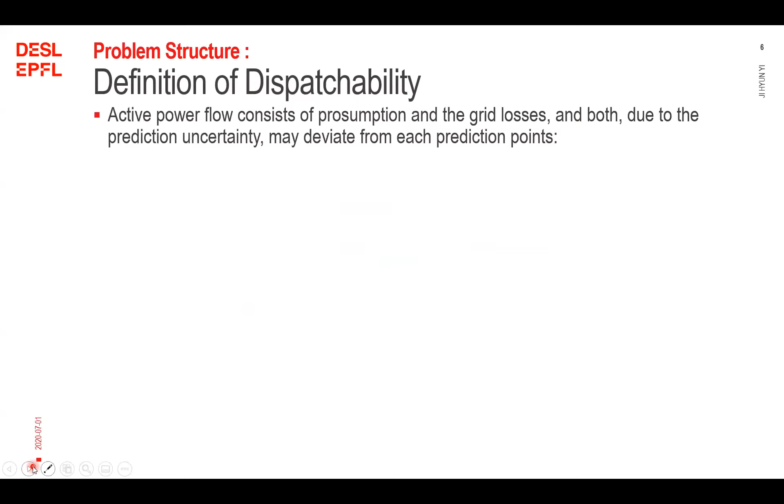First, let's have a look at the definition of dispatchability. The active power flow at the GCP consists of prosumption and grid losses over all nodes within the network. Due to prediction uncertainty, the prosumption at each node deviates from the prediction point, as well as the line losses. Therefore, we express the prosumption and grid losses by prediction and deviation.

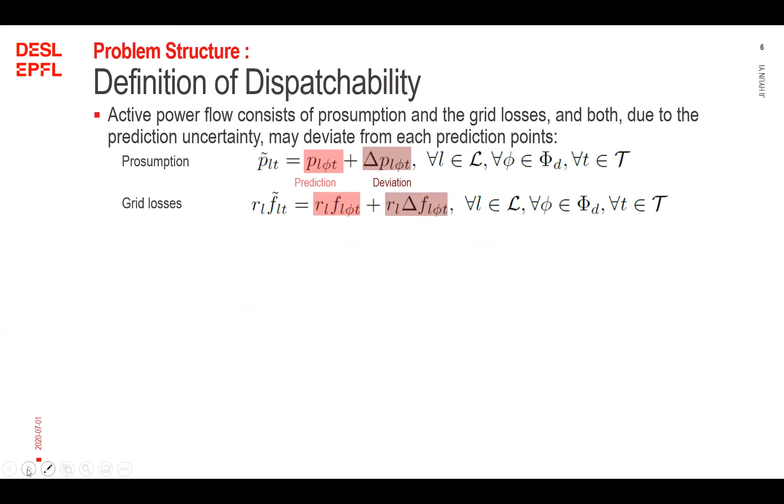The dispatch plan denotes the predefined schedule of active power flow at the GCP that the feeder should follow. It is determined based on the sum of the offset profile of each ESS and the aggregated prosumption prediction, considering the grid losses.

The power mismatch between the dispatch plan and the realized active power at the GCP can be indicated as the left side of this equation. This mismatch can be divided into two terms: the mismatch covered by the ESS, and the leftover mismatch, which would be observed as dispatch error at the GCP.

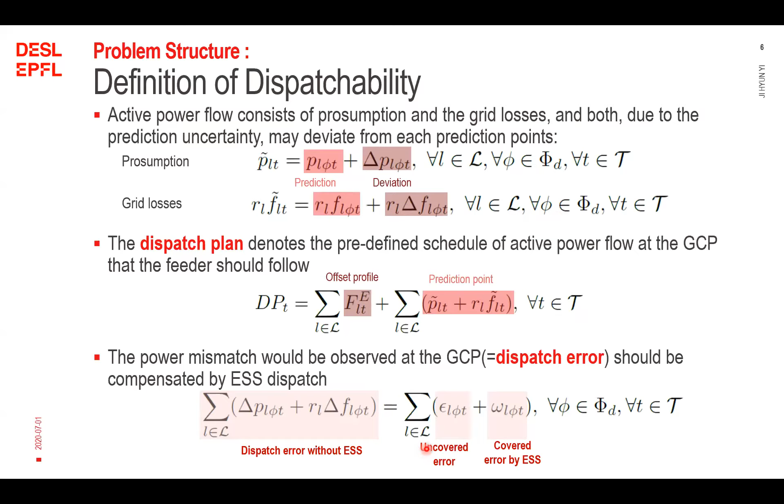In order to enhance dispatchability, the ESS control strategy is designed to maximize exploitation of the ESS capacity for compensating the uncertainty due to the stochastic nature of the resources, while complying with the ESS energy and power operating constraints. The control term is defined as the offset profile, which is assigned to each of the allocated ESS, as shown in the expression here.

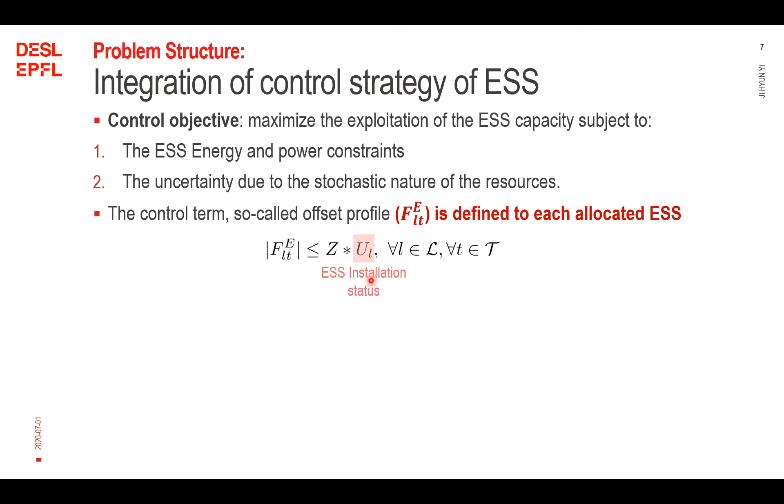The offset profile adjusts the ESS active power with the objective of restoring an adequate ESS state of energy, such that during operation, enough up and down flexibility is available to compensate the mismatch between the prediction and the realization of the prosumption.

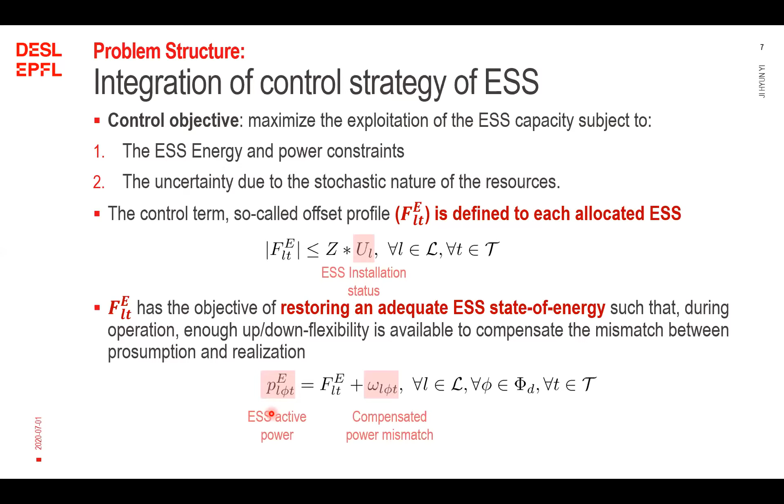The offset profile is embedded into the operation of ADN by simply adding the offset profile to the dispatch plan, along with the prosumption prediction.

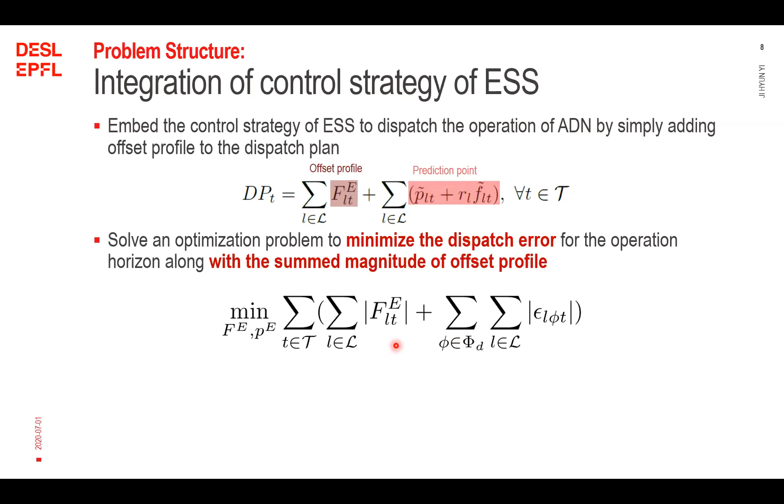We solve an optimization problem to minimize the dispatch error for the operation horizon, along with the summed magnitude of the offset profile, while subjected to the network constraints and also the ESS-related constraints. We can determine the dispatchability of ADNs by the total magnitude of dispatch error for the operation horizon.

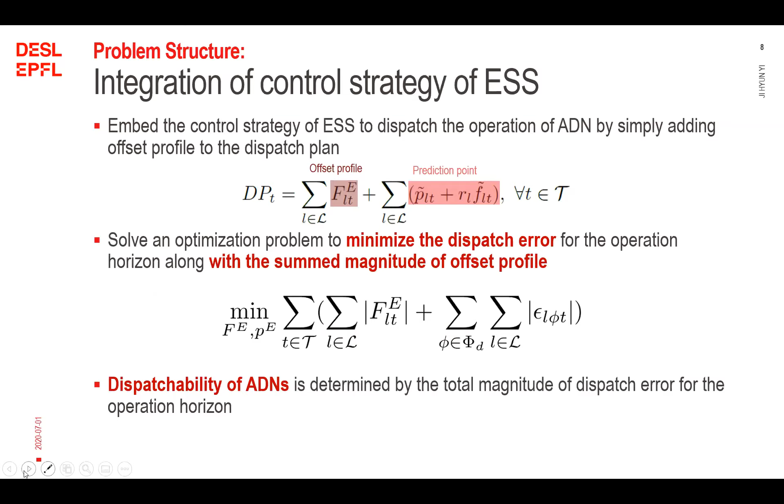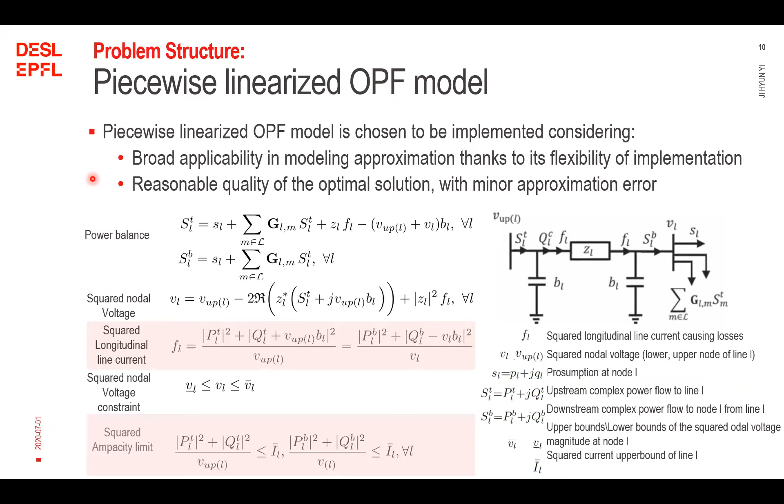In order to convexify it, it is converted to a piecewise linearized OPF, which I would call PWL OPF from now on. We chose to implement the PWL OPF because the method is widely used in tackling various research interests in power systems, thanks to its flexibility of implementation. Also, it can achieve the optimal solution of reasonable quality with minor approximation error from the original OPF solution.

In PWL OPF, we linearized the nonlinear term within the power flow equations and constraints. First, we replaced the nodal voltage variable with the voltage lower bound value. Then we apply the piecewise linearization function to all the quadratic terms, which are the upstream complex power flow on the line and downstream complex power flow on the line, and also the line longitudinal reactive power.

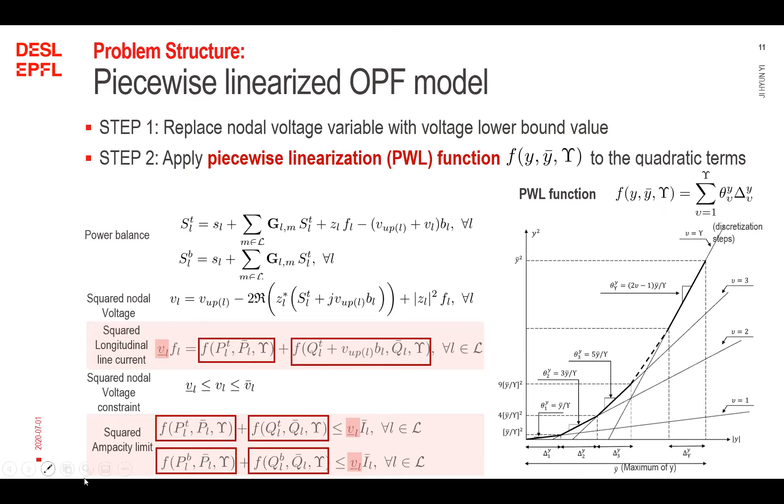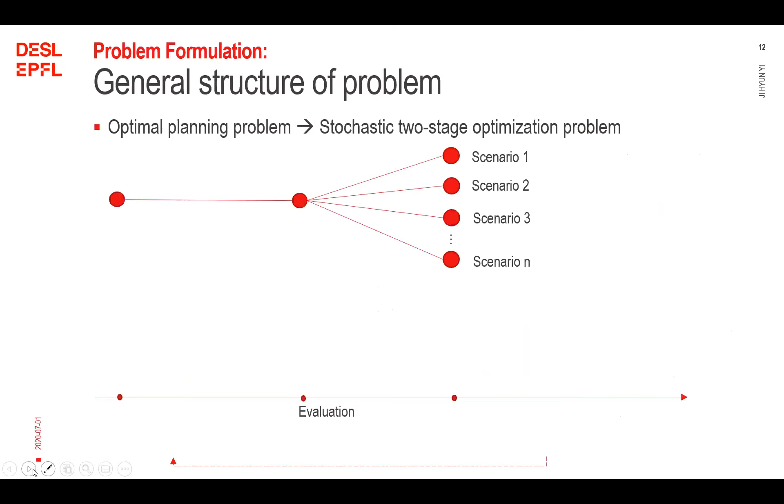The planning problem is formulated into a stochastic two-stage optimization problem. In the first stage optimization, investment decisions including ESS installation, energy reservoir, and power ratings are determined. And the prosumption uncertainty is realized in the second stage optimization as operating scenarios.

In the second stage, considering different operative scenarios, the ESS contribution is assessed based on the OPF model, taking operational decisions such as offset profile and ESS dispatch regarding the dispatchability of ADN. When the optimal solution is obtained both from the first stage and the second stage through an iterative process, the global optimal solution is obtained.

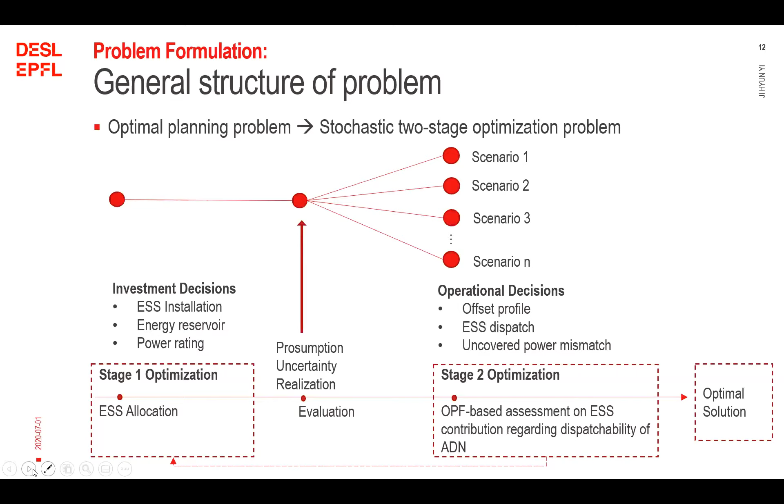More specifically, we present a two-stage procedure for the optimal siting and sizing of ESS, considering the control strategy of ESS. To tackle the computational complexity of the proposed planning problem, we decompose it into two problems by applying Benders' decomposition technique. The first is the master problem, which corresponds to the first stage optimization problem explained on the former slide. And the second is the subproblem, which is equivalent to the second stage optimization problem.

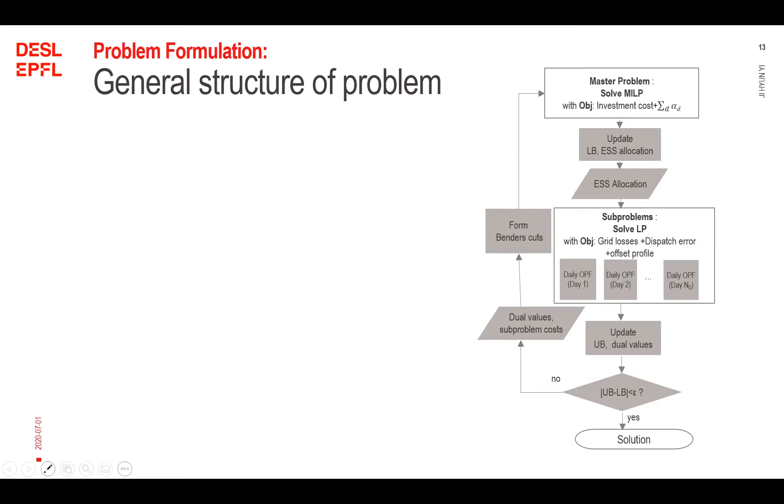In the master problem, we determine the ESS allocation with the objective of minimizing the investment cost of ESS, which comprises the fixed cost, power rating cost, and energy reservoir cost. Also, the approximated subproblem cost should be added. The constraints are grouped as the investment constraints and the cuts for the Benders' algorithm.

Investment constraints include the possible power rating range and the energy reservoir range, and also the maximum power that can be discharged or charged relative to the maximum capacity.

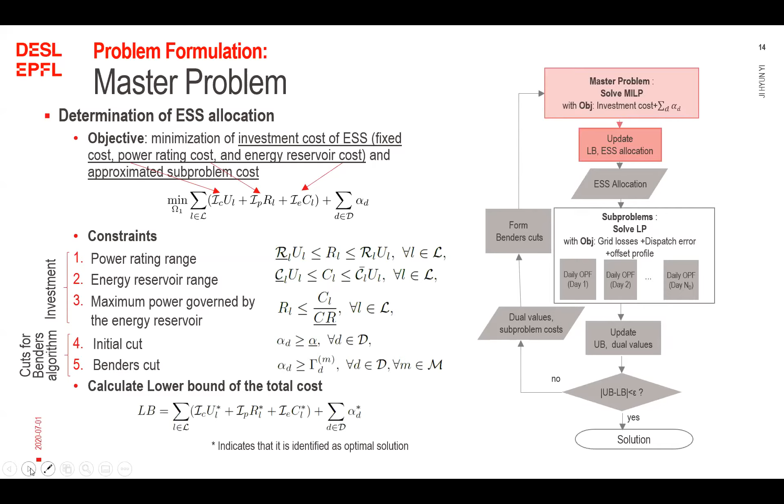For the Benders' cuts, there should be an initial cut which lower bounds the subproblem cost at the initial stage, and then Benders' cuts get added with each iteration of the Benders' algorithm. When the master problem is solved, we can calculate the lower bound of the total cost from the optimal solution, and we'll call it LB here.

The subproblem evaluates the system operational condition regarding the dispatchability while determining operational decisions to control the ESS and the grid.

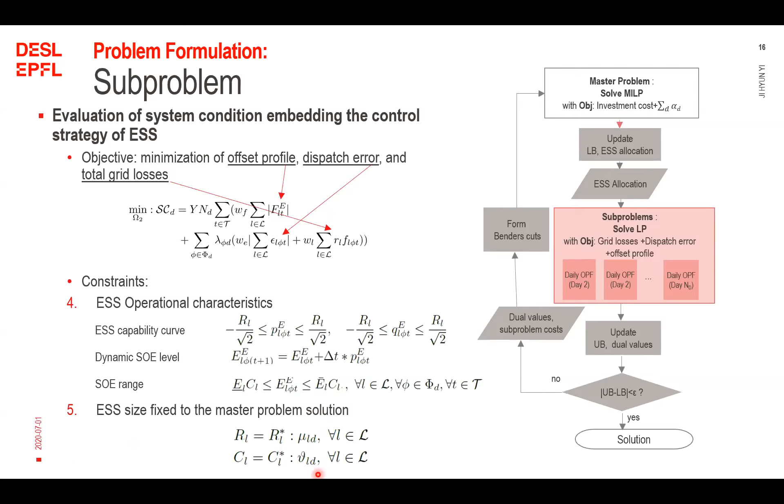After the subproblem is solved, the upper bound (UB) is obtained by adding the subproblem cost to the cost from the master problem. The difference between the upper bound and lower bound is checked. If the difference is bigger than the tolerance, using the dual values from the subproblem, we generate the Benders cuts with the dual values and subproblem cost, and resolve the master problem. After a certain number of iterations, as the difference between UB and LB gets lower than the tolerance, the optimal solution is finally obtained.

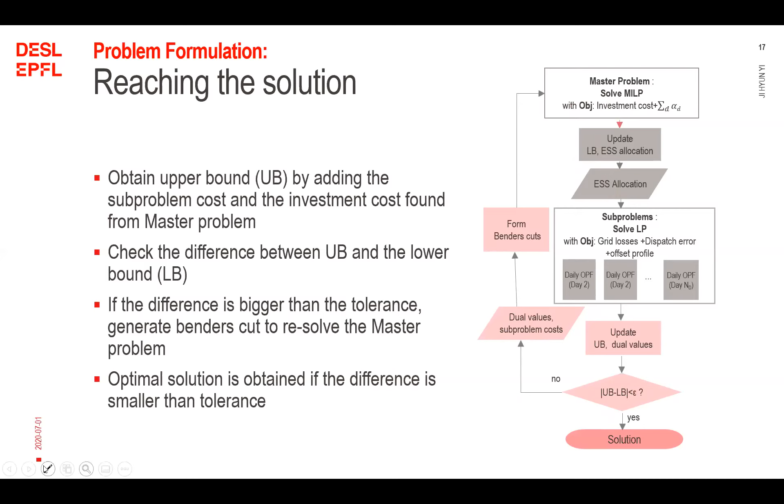To verify the effectiveness of the ESS control scheme, we demonstrate the simulation on a real Swiss grid consisting of 55 buses located in Aigle. The planning horizon is set as 10 years. The peak prosumption is 3.6 megawatts and PV capacity is 2.7 megawatts peak. The hydropower capacity is 805 kilovolt-ampere in the network.

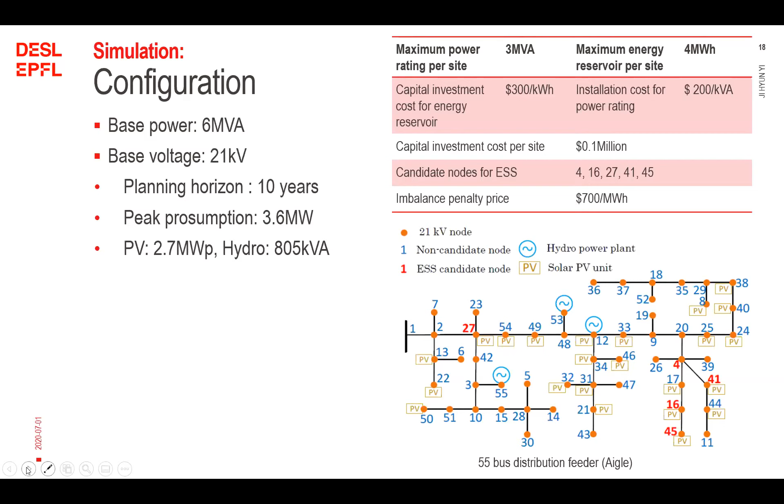In order to reflect seasonal variation in prosumption, we chose 8 day types. For modeling the prediction uncertainty, we generated 1,000 scenarios for each day type, then reduced to 10 scenarios using K-medoids clustering scenario reduction.

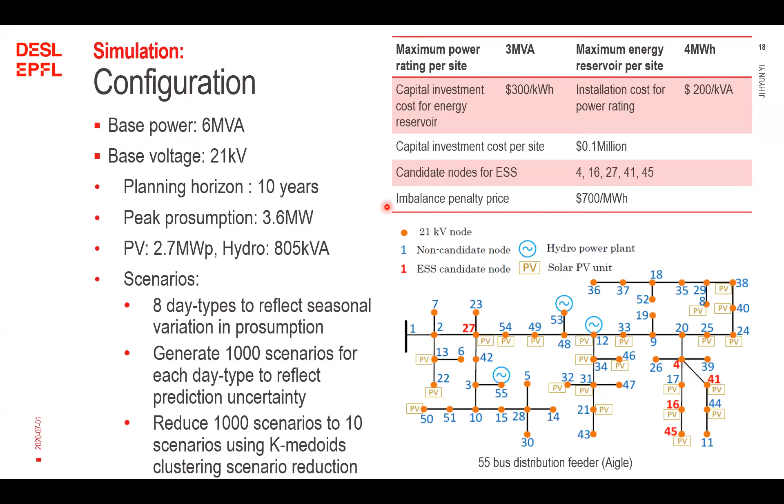The specification on the ESS cost and the candidate nodes are given in the table, along with the imbalance penalty price, which is set to be very high compared to the real energy market price in order to reach the sufficient level of dispatchability.

We conducted the simulation based on 3 cases: with no ESS allocation, with ESS allocation embedded with the control strategy, and the last case with ESS allocation but without the control strategy.

This is the result of the allocation. At node 4, both ESS energy reservoirs and power ratings are bigger in case one than in case two, whereas at node 27, the energy reservoir is bigger in case one, but the power ratings are similar in both cases.

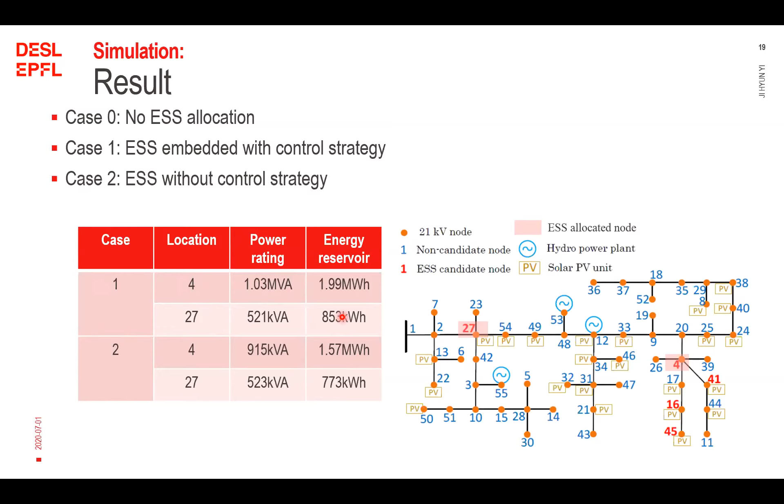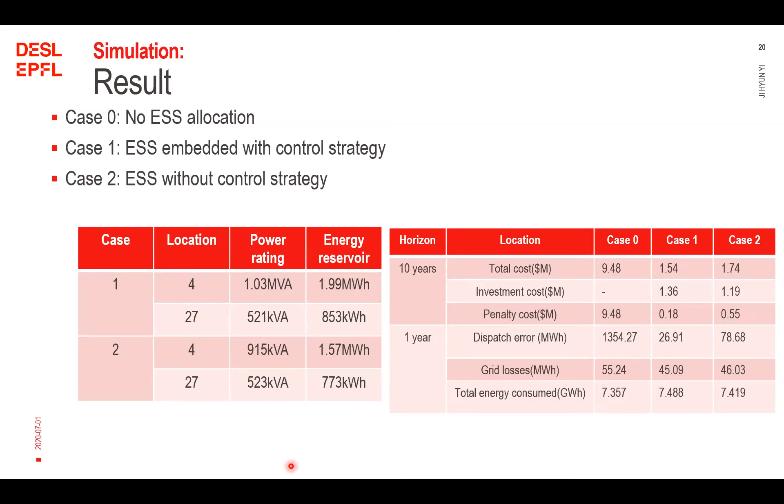But overall investment cost is $0.17 million larger in case one, and the annual uncovered dispatch error is lower in case one, at 51.7 megawatt-hour. This leads to a reduction of $0.2 million in the total cost for case one compared to case two. This difference in allocation and dispatch results can be associated with the efficiency of the ESS control scheme.

Thanks to the offset profile, the utilization of the energy reservoir capacity at each dispatch interval can be optimized, considering up to the dispatch error anticipated in upcoming intervals.

So to summarize, this paper proposed a procedure for the optimal siting and sizing of ESS within the ADNs hosting a large amount of DRER. And the ESS control strategy is integrated to fully exploit the energy capacity of the ESS for the compensation of the dispatch error. The allocation of ESS planning is defined by formulating and solving a scenario-based OPF, which is then convexified and linearized as a PWL OPF model.